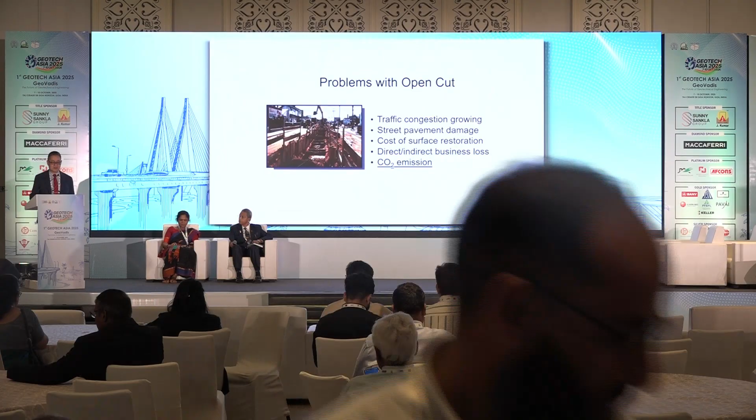Especially the mega cities with aged old pipelines. And as I said, the problems of the open cut, including traffic congestion, pavement damage, and indirect business loss, and also CO2 emission - those concerns are more and more important nowadays. So that's why trenchless technology is more and more attractive than before.

So according to the definition given by the International Society for Trenchless Technology, actually there are three major categories of this technology. The first one is on the top, called condition assessment, including the exploration of existing pipelines or underground structures.

I think most geotechnical engineers are quite familiar with that - we can use geophysical exploration to explore the underground conditions. That's one of the subcategories, on the left-hand side.

But on the right-hand side, for aged pipelines, we have to know the condition of the existing pipeline, so sometimes we have to do some internal inspection. The most common method, as you may know, could be CCTV inspection. But actually there are other technologies under development.

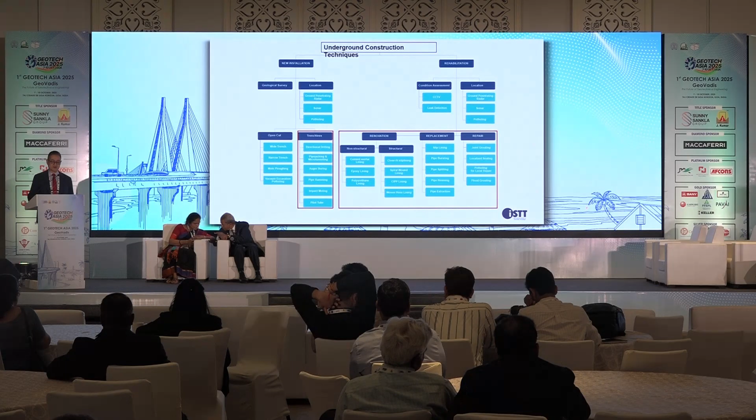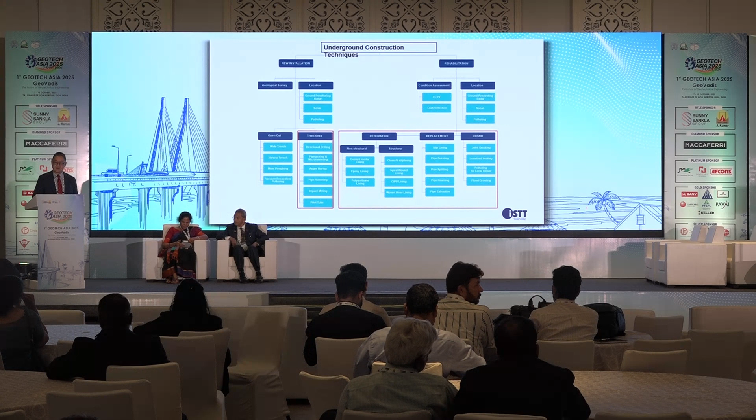Also recently, due to climate change, we have extreme rainfall. That also could cause some problems. You can see from the news, we have more and more sinkholes, surface collapse happening.

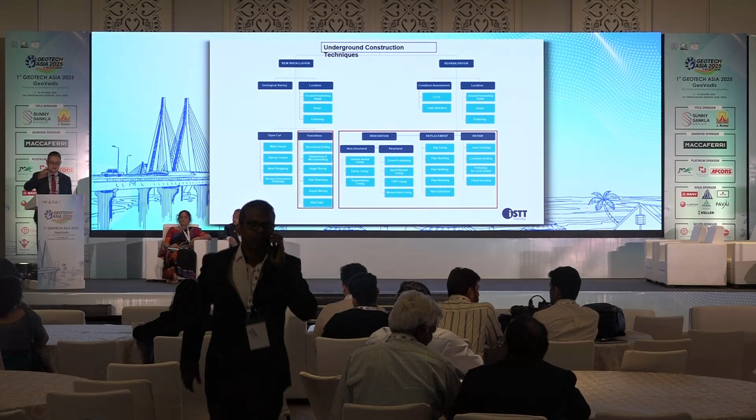The challenge now is how can we use methods to explore the potential location of sinkholes and surface collapse, especially since some of those sinkholes and surface collapses could be due to leaking pipelines or damaged connectors of the pipelines. So this is another subcategory of the condition assessment.

Right upper part of this diagram. And for the lower part, lower left is the technologies we can apply for new installation. I think we might be familiar with technologies called pipe jacking, shield tunneling, directional drilling - that's the most common, most popular method.

Actually, there are more than those three methods that we could apply. Each method has its advantages and disadvantages. So if you are interested, you can check the ISTT website - we have a new version of the guideline, a technical guideline. We have maybe more than 20 methods you could apply for new installation.

On the right lower part is the method we can apply for rehabilitation. We have a method that can be used for local repairing, and also we could just replace the old pipeline by installing a new one. In other words, the old pipeline will be abandoned.

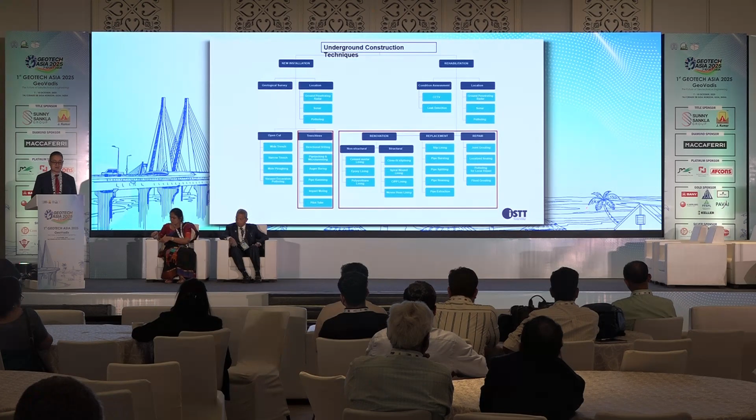The third subcategory we call renovation, means that we still keep some function of the old pipeline, but we install a liner to improve its function. So that's the method.

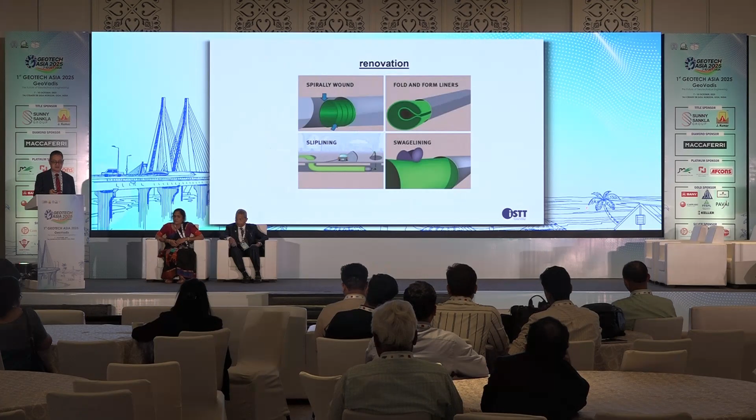Okay, so for the sake of time, I will skip this, focusing on two methods. I would like to show you that we have done some research. The first one is the rehabilitation, CIPP.

CIPP is the abbreviation of cured-in-place pipe. We install a liner inside the pipeline to improve its function, and the lifetime can be extended for 30 or 50 years more. The shape of the pipe can be different geometries.

The left-hand side is the image for the liner. The liner will be marinated with resin and hardened by the chemical reaction. It could be cured by heat or light, and then the liner becomes a hard pipe inside the pipe, as you can see from the upper right image. Then the pipeline has reborn.

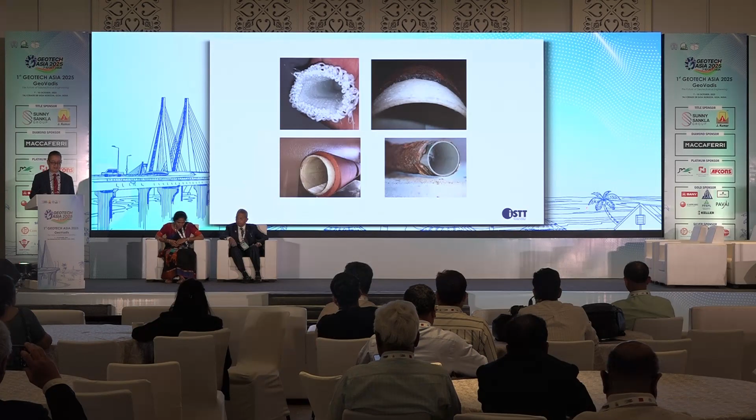So the application of CIPP can be used for pipes experiencing deformation, corrosion, and disengaged connectors, etc. The shape can be quite different.

The research we did is trying to understand what are the major control factors for the performance of the CIPP rehabilitated pipeline.

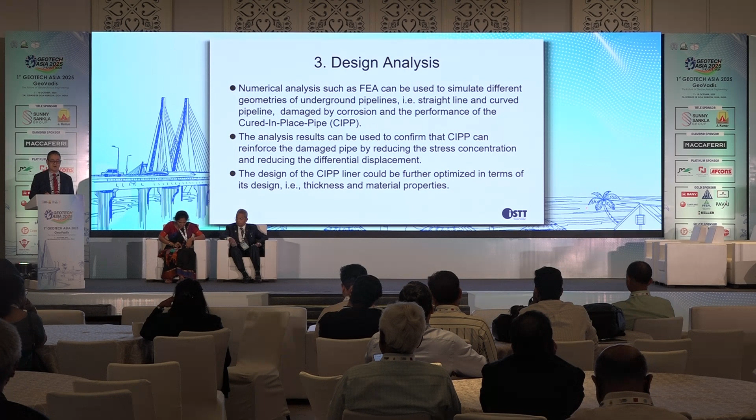If we think about the problem itself, it's more like a soil-pipe interaction, very similar to the simulation of tunneling in soil mass or rock mass. The only difference for this model is that we have one more layer, a thin layer of liner inside the existing pipeline.

So we have two interfaces instead of one. One interface is between the pipeline and the soil mass, the other is between the CIPP liner and the pipeline. We have to determine the parameters, the mechanical properties of those interfaces, in order to have a meaningful simulation. That's the important thing.

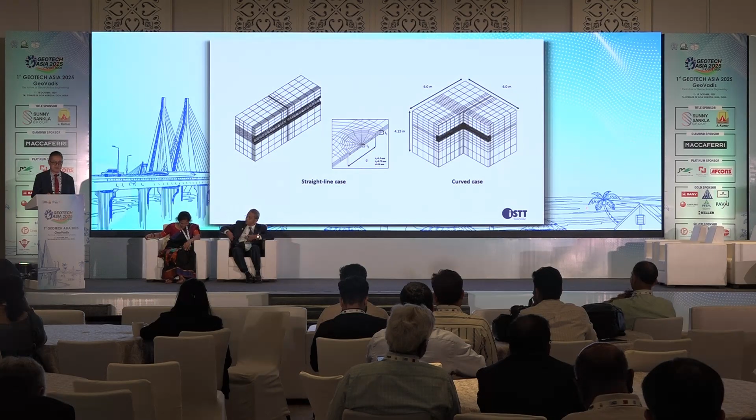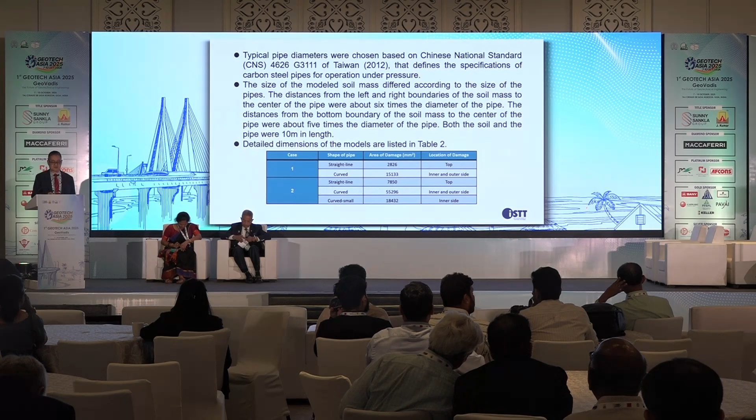So those are the parameters we applied, shown in this table. And also we simulate the problem with different geometries.

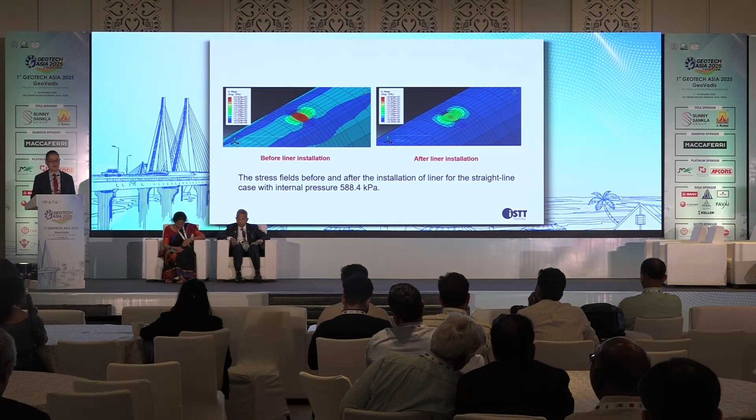These two figures show the stress distribution before and after the rehabilitation. You can see that after we install the CIPP liner and apply internal pressure, the stress concentration can be relieved. In other words, it also shows the performance of the CIPP rehabilitation.

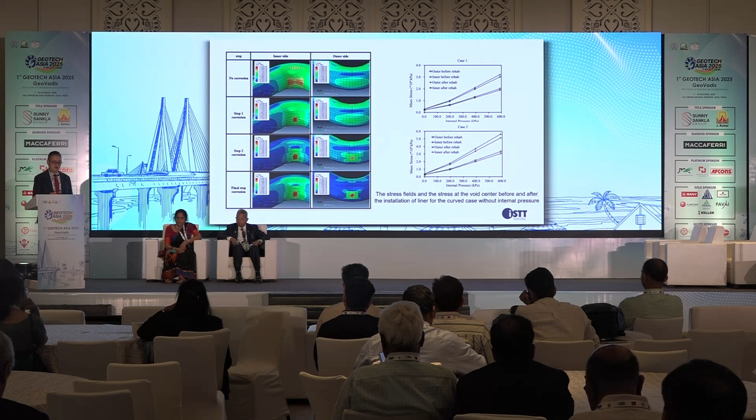So these are the performance results for cases with curved alignment. The cavity can be on the inner side or the outer side of the curve. For both cases, the performance is similar to the straight line case. The comparison shows those four figures in one column mean different depths of corrosion.

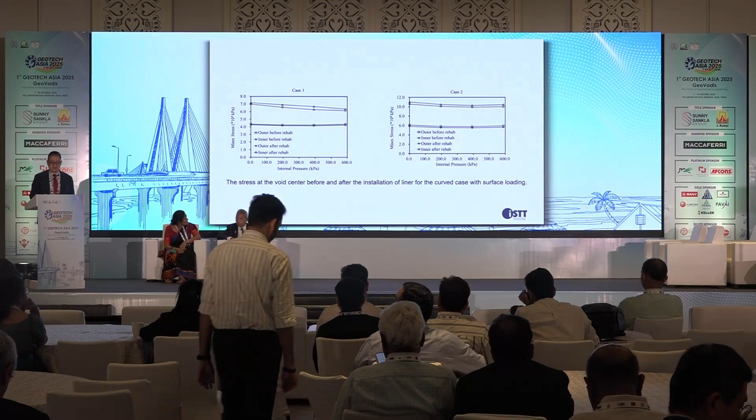So these two figures show the case, also a comparison based on the previous figure. It shows the performance as well.

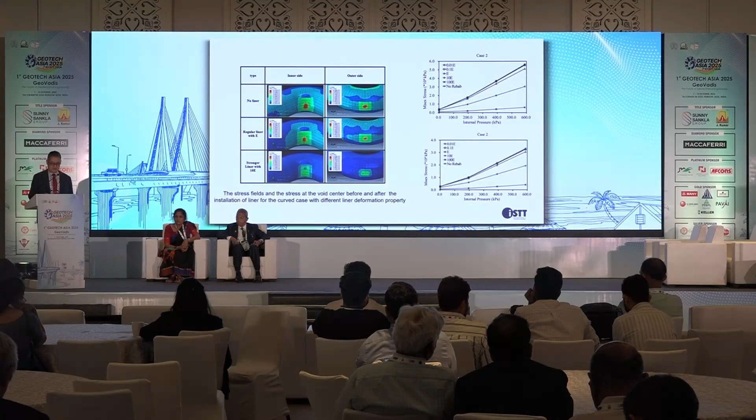Generally, in practice, the thickness is suggested by the supplier, the material supplier, based on their experience. But as a geotechnical engineer, we can double check whether it's over-designed or under-designed by using the analysis tools. So this is the beauty of this analysis.

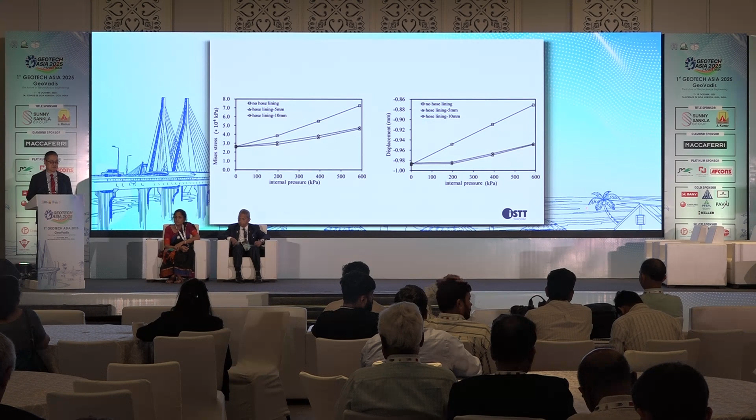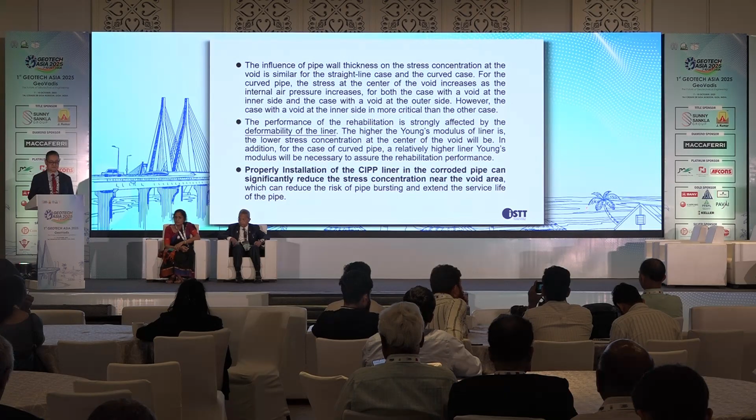Okay, this is the first part for the application of trenchless technology for rehabilitation. We also did some analysis for the rehabilitation of disengaged connectors, and we considered different scenarios. If you're interested, I can share some of our published papers. So this is the second part. The third part is new installation.

I'm going to talk about the series of analysis we've done for pipe jacking. As we know, for pipe jacking projects, the most important thing could be the jacking force. If the jacking force is not enough, maybe the pipeline cannot be jacked to the target location. But if the jacking force is too large, maybe that will damage the connector or the pipeline itself. So determining the jacking force can be very difficult.

Generally, we have some empirical formulas given by different scientists, guidelines, or standards. You can find these from guidelines of different countries, but still most of those formulas are empirical. Some guidelines are very detailed - they classify pipe jacking into different types of jacking machines, different diameters, different geomaterials, and you apply different formulas accordingly.

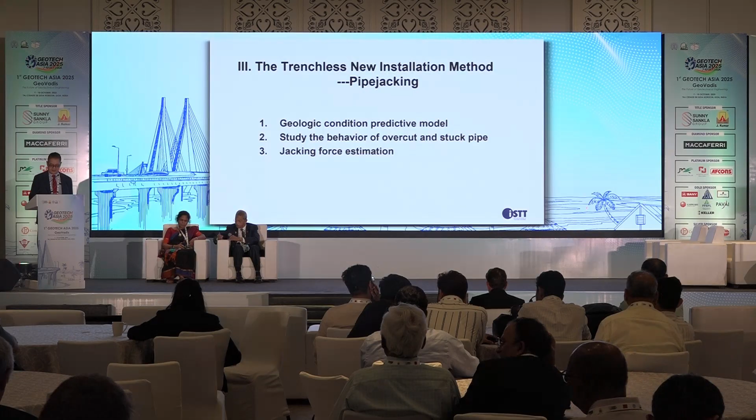We adopted one case in the Taiwan area, which could be very challenging because most of the formulas are not applicable. The geology for this case is on the west side of Taiwan, where we have a lot of alluvial formation, but with large size gravel like this. The largest diameter can be up to 1.2 meters - very big, almost the size of the pipe jacking machine. So very challenging.

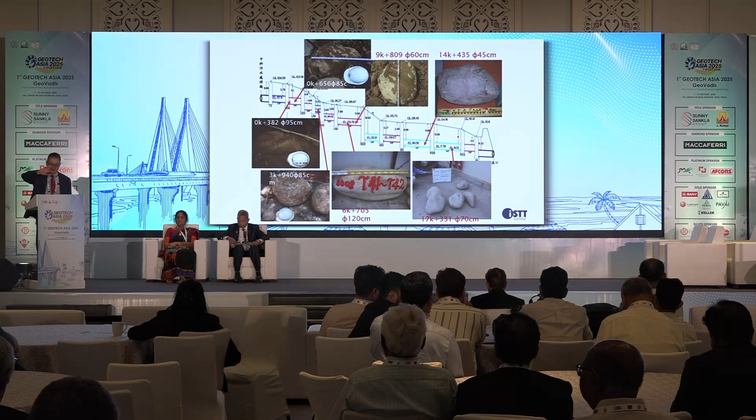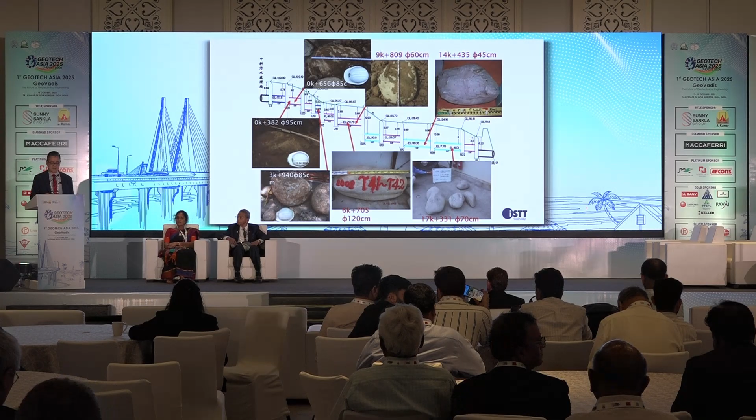So we tried to find the control factors, the important factors for the pipe jacking project first. We developed some geostatistics models to predict the probability of encountering large size gravel, in order to help the manufacturer of the pipe jacking machine improve their cutter head.

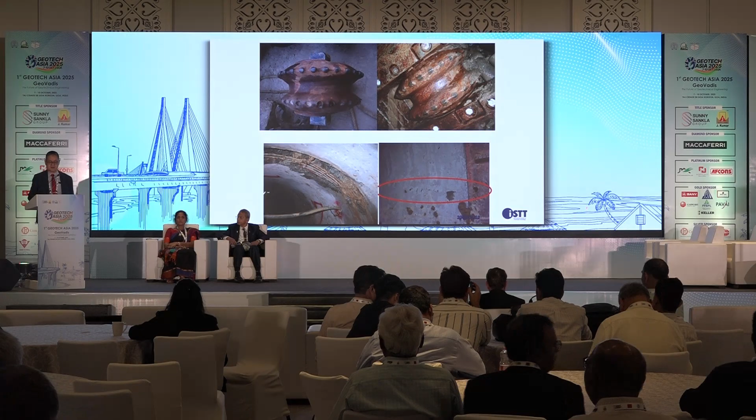You can see this is the difficulty or problem we encounter. This cutter abraded seriously - that will damage it, and since this cutter doesn't work anymore, the cutter head itself could be damaged further. So this is one of the major problems: abrasion.

And the second problem we could encounter is that the gravel gets trapped in the annular space and stuck the pipe string behind the pipe jacking machine, and it could also damage the connectors. This is the problem we have.

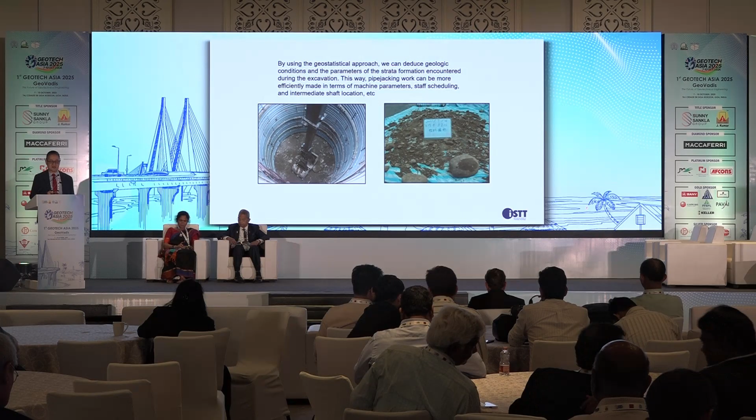So what we did first is try to collect samples from the launch and arrival shaft, do some sieving analysis, and use this model to see what geology we could encounter during the jacking operation.

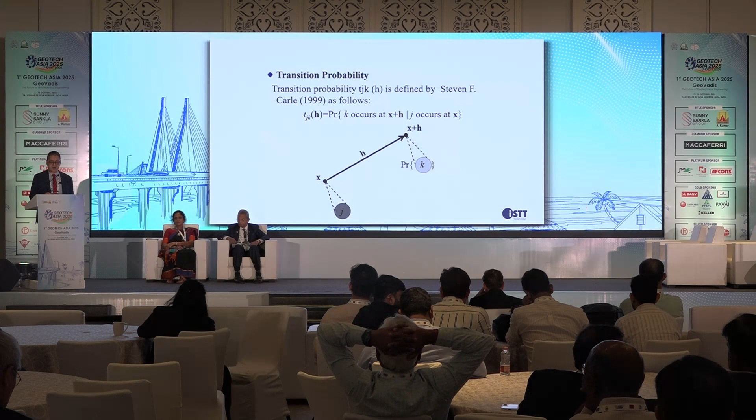Some mathematical model can be used, and we also applied a transition probability theory model to predict the largest gravel between the launch shaft and arrival shaft. This is the model we developed.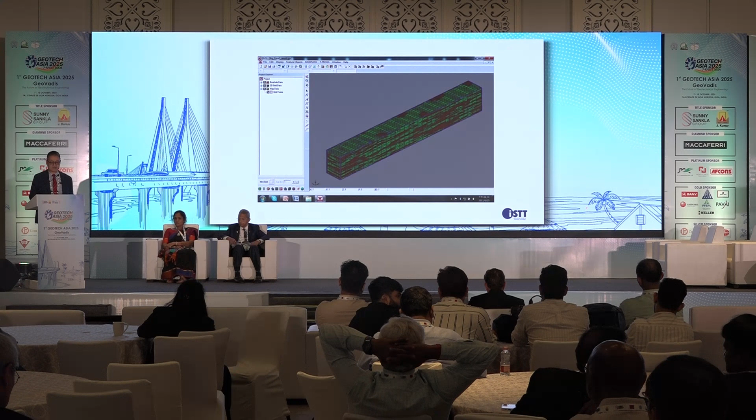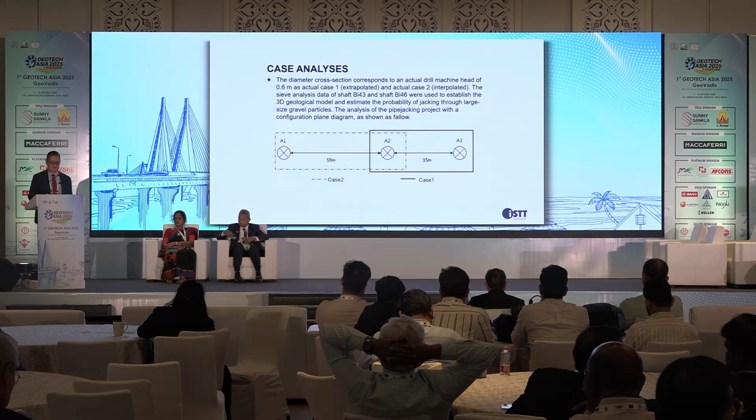You can see we separate the size into three different sizes, trying to simulate the geology with this model. Okay, this is the second part of the development, and then we can compare the advancing rate with the results of the statistical analysis.

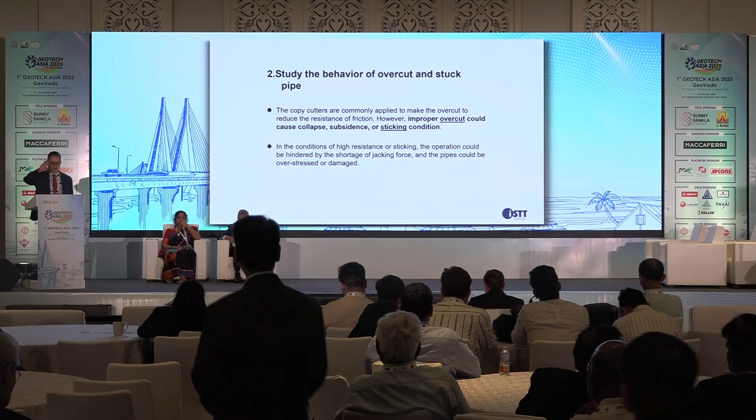So then let's talk about how, since the gravel can be loosened by the excavation, it can get stuck in the annular space between the pipe jacking machine and the soil mass. So the behavior of the overcut and the stuck pipe string was further studied.

So that's the analysis we did. Based on this finding, I think the major finding is that backfill will be helpful for the stress distribution, the stress field, and also lubrication to the interface is very critical, very important. Totally stuck conditions should be avoided, so injection of lubrication is essential for smooth operation.

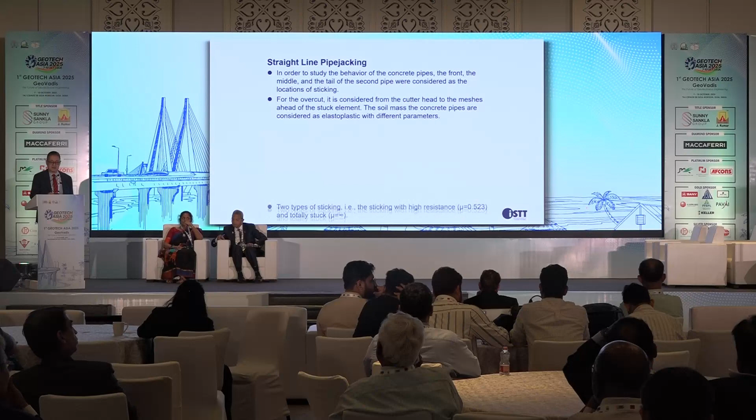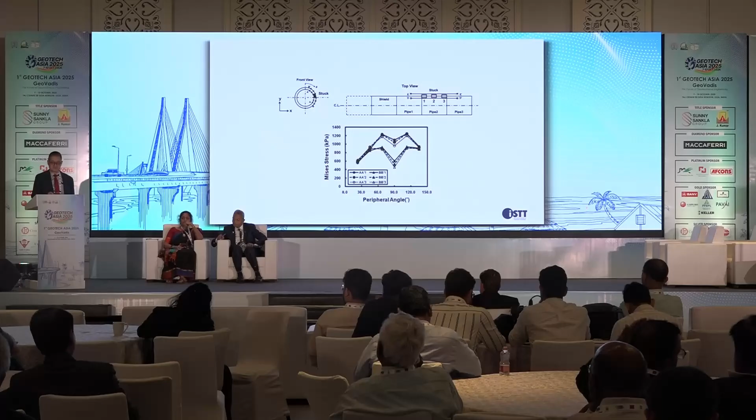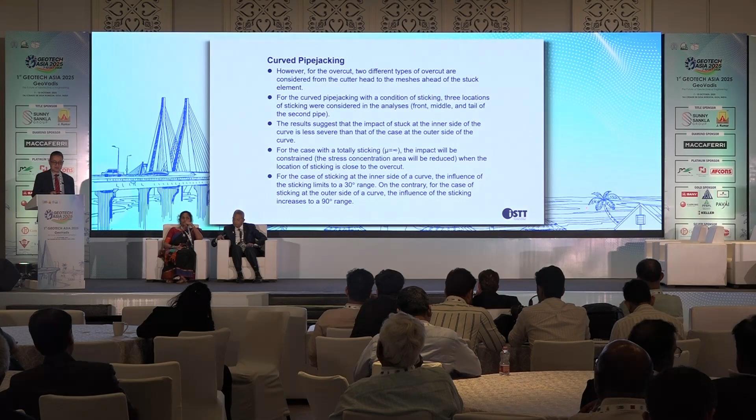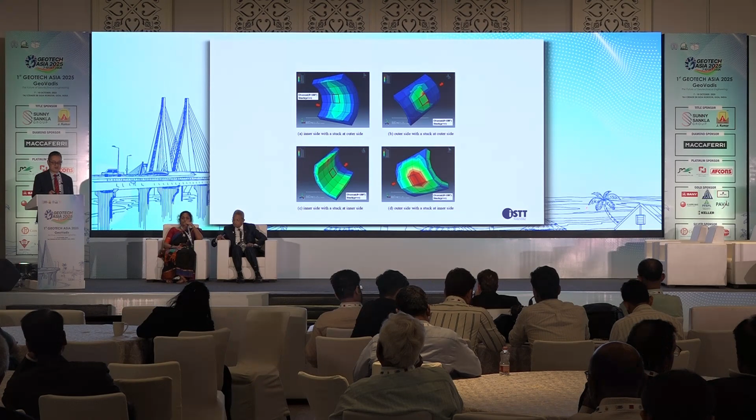This is finding the stress distribution, and also the results for the scenarios with different condition of the stuck, location of the stuck, you can see. So also, similarly, we did a similar analysis for curved pipe jacking. So again, we simulate the cases with the different scenarios of overcut and different locations of stuck. Most of them are stress analysis and comparison.

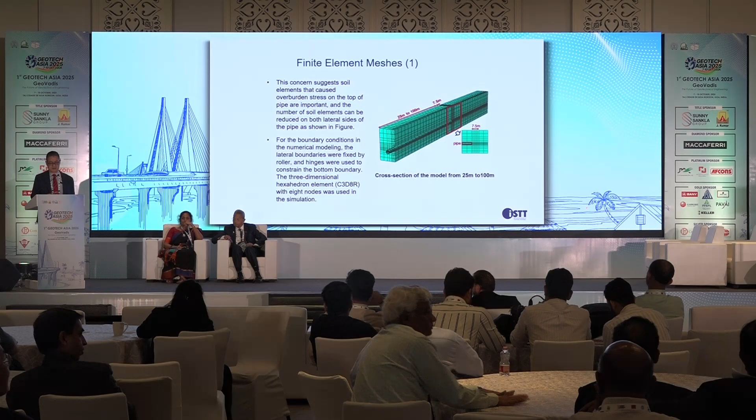Okay, for the jacking force prediction, as I mentioned previously, the most common way to predict the jacking force is to use the empirical formula. But we found that the formula can be quite different, especially when you jack the pipeline longer and longer. The discrepancy between the jacking force predicted by different empirical formulas will be large. So it's quite uncertain based on this prediction.

So what we did is we tried to use the method called displacement control method. Because when we simulate the pipe jacking, we apply the force behind the jacking machine to push the pipeline ahead. Although we put in place the interface property with a suitable frictional coefficient, still it's difficult to determine the jacking force. Sometimes it's pushed too far, sometimes it's pushed not enough. So the method we apply here we call the displacement control method.

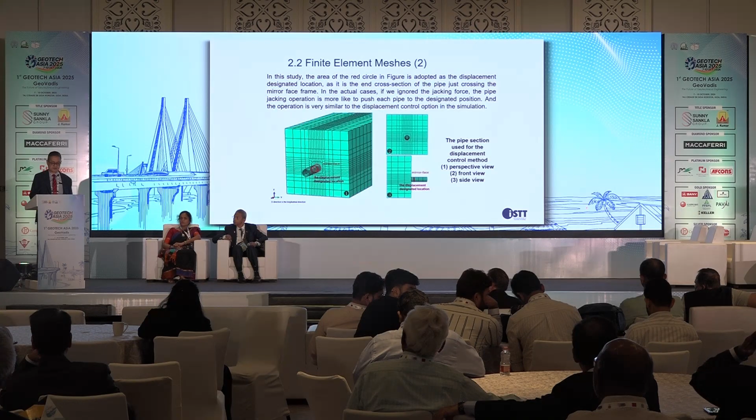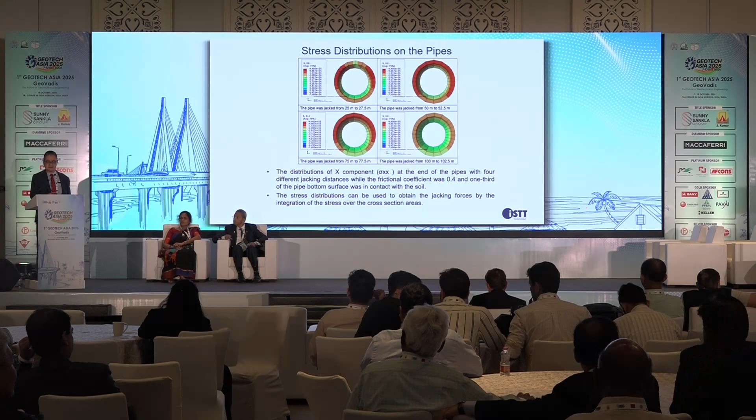You may remember that for the numerical model, we can assume that the pipeline moves forward a certain distance. So we manually or artificially move the pipeline ahead to the distance we assign. And then we integrate the stresses behind the element representing the pipe jacking machine. So we can determine the jacking force based on the integration of the stresses. So this is the idea. So you can see the distribution of the stresses behind the pipe string, and we integrate that to determine the jacking force.

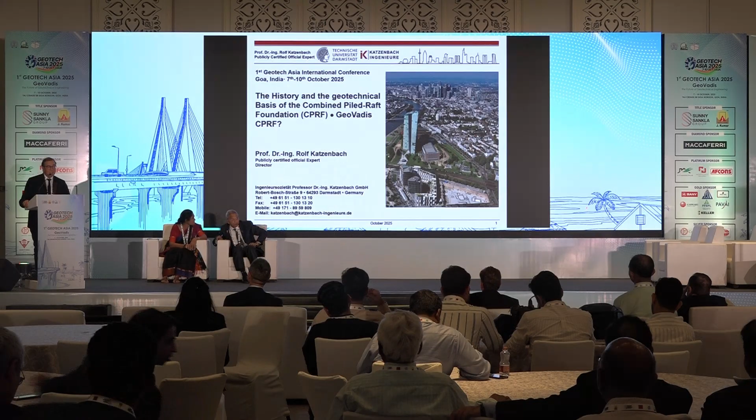Let us look to the history you have seen in the first slide. My home city, Frankfurt. The front there is the European Central Bank, and in the background the banking center. In Frankfurt, we have the following ground situation. On the top, after 4 to 6 meters of quaternary gravel and sand, we have the so-called Frankfurt clay. The stiffness is increasing with steps, with values of about 15 to about 50 meganewton per square meter.

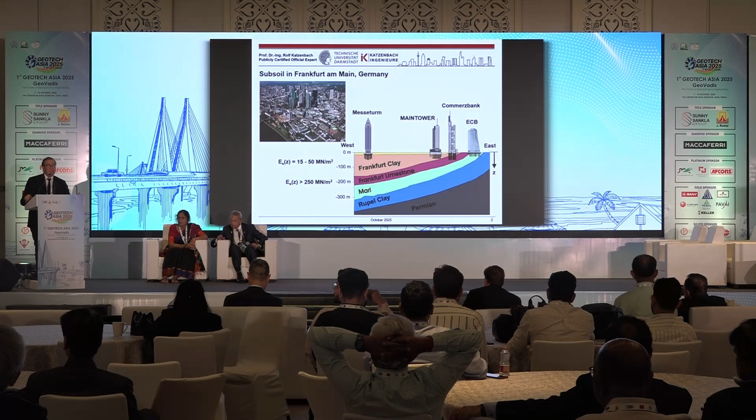Under Frankfurt clay, we have limestone, quite stiff material with a stiffness of more than 250 meganewton per square meter. That is more or less a rocky layer. That means ideal for geotechnical experts and consultants. At each position in Frankfurt, we have other and changing ground conditions.

What is the problem in my home city, Frankfurt? You see the problem a little bit from the curves on the right-hand side. There is plotted versus epsilon 1, the vertical strain, the stresses, or the deviator stresses, sigma 1 minus sigma 3. And you see a lot of different curves with relatively normal, respectively high stiffnesses. And at the bottom of these curves in red, you see the load settlement curve or the stress-strain relationship of

Frankfurt clay. And from this weakness of Frankfurt clay, you can imagine that the main problem which we have in Frankfurt are the total settlements, especially of the high-rise buildings. And if you have great total settlements, the next problem are the differential settlements. So it's necessary to find a technology for the reduction of settlements in the relatively soft Frankfurt clay.

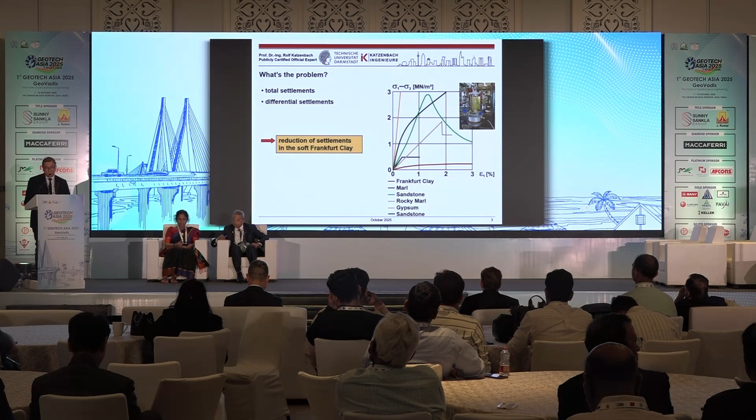Some examples, and we understand that as geotechnical engineers as large-scale tests, in parentheses for sure. The first generation of the Frankfurt high-rise buildings were founded on shallow foundations on big rafts. The reason was it was totally impossible to create bored piles in Frankfurt clay. There were no machines available in the 1970s and in the early 1980s.

So we had extremely high settlements, for example, for the Marriott Hotel with a value of 34 centimeters. 34 centimeters. That is normally not tolerable, I would say, for a building which is more or less used as hotel and as office center.

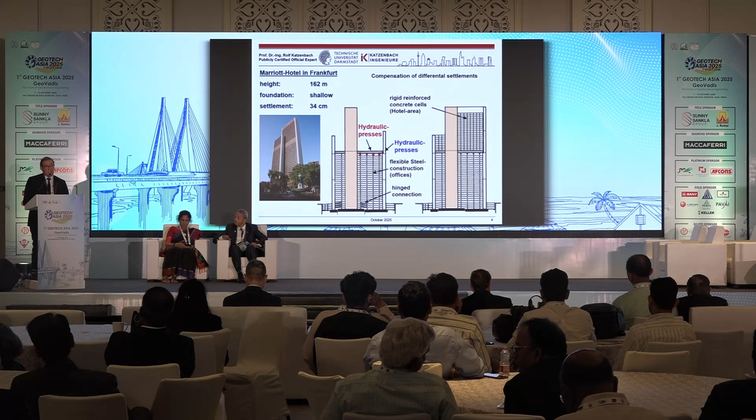And because of the differential settlements, it was necessary to install hydraulic pressure cells at the level of about 20-25 stories in order to have a horizontal basis for the upper part of the building with a hotel sector with a very, very rigid construction made of concrete cells. And these concrete cells would never allow the deflection and the differential settlements which occur there.

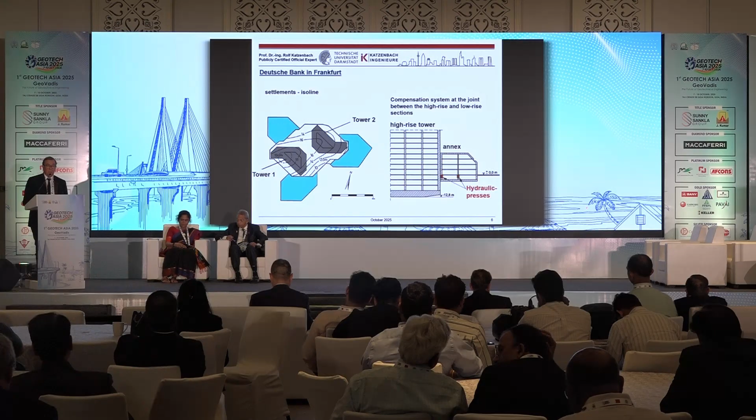Meanwhile, these technical rules are updated, so that it is indeed allowed, even by the German standards and the European standards, to mix these types of foundations and to combine them. And from that, the name is derived, combined piled raft foundation. And the best example for this is India.

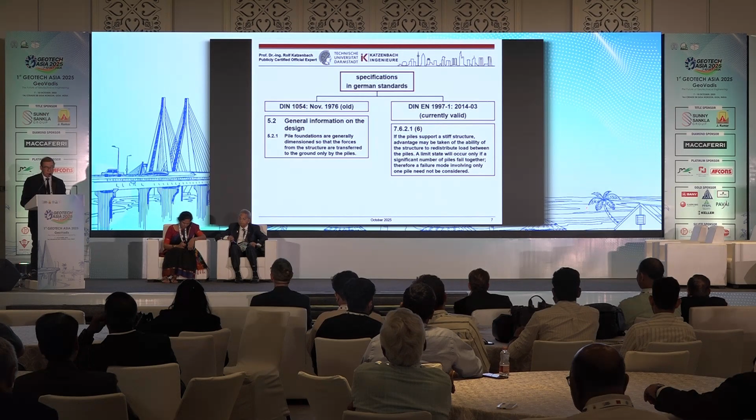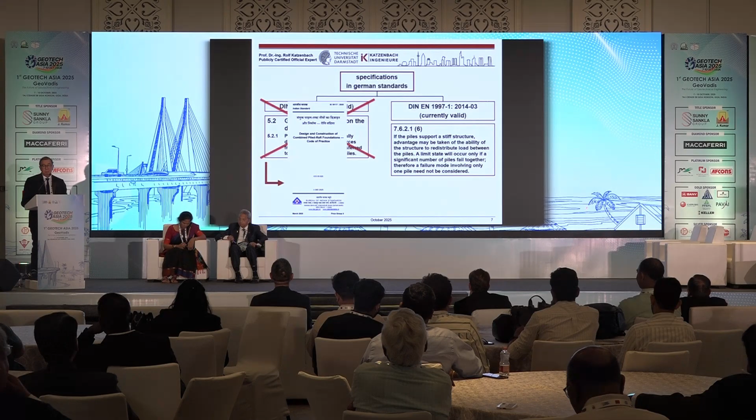In India, we have indeed wonderful technical standards, the so-called Indian Standard with the number IS 19117, where the rules for the design and the application of combined piled raft foundations as a code of practice are available. So the old-fashioned one you can forget, and it is now given by this standard which I mentioned.

Combined piled raft foundation has a lot of advantages and objectives: reduction of settlement and tilting, increase of bearing capacity of a shallow foundation, and so on. To make a long story short, combined piled raft foundation is a special form of soil improvement technology. You put piles in addition to the foundation system and create stiffness, and with a great advantage, you transfer loads from the level of the foundation into deeper areas where mostly stiffness is increasing, like in my home city, Frankfurt.

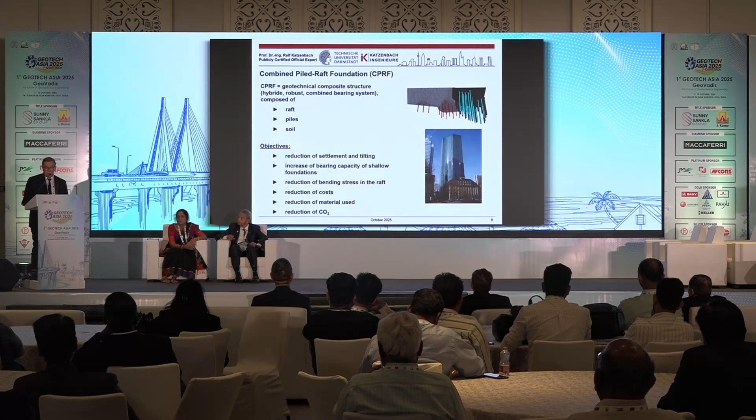Now it doesn't proceed. Oh yeah, there it is.

Short information about the methodology we work by, carrying out at least the rules for the design of a combined pile raft foundation. And that is always the same. You know that from your own personal experience. On the one hand side, the theoretical model that must be top and without any mistakes, and the experimental research on the other hand side. And the most important thing are the measurements at the site.

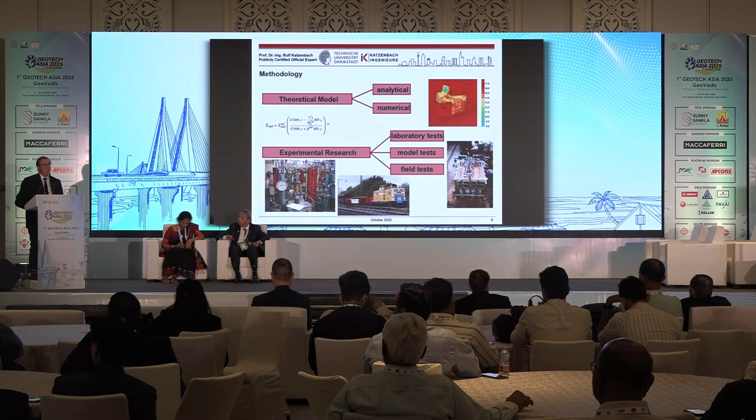We understand each high-rise building as a big field test where we get the real information about the behavior of the construction. I can tell you an important story, which is not normal worldwide, as I learned from a lot of conferences. In Frankfurt, it is a duty given by the building authorities that all these high-rise buildings are controlled by a monitoring system until 5 years after construction, so that we have real and very perfect information about the real behavior of high-rise buildings under the local conditions.

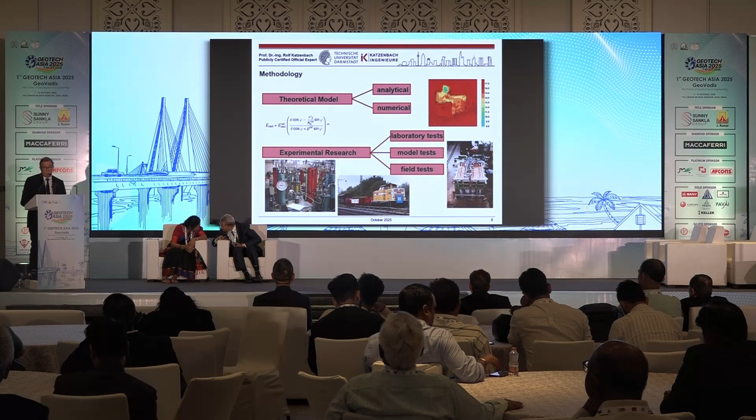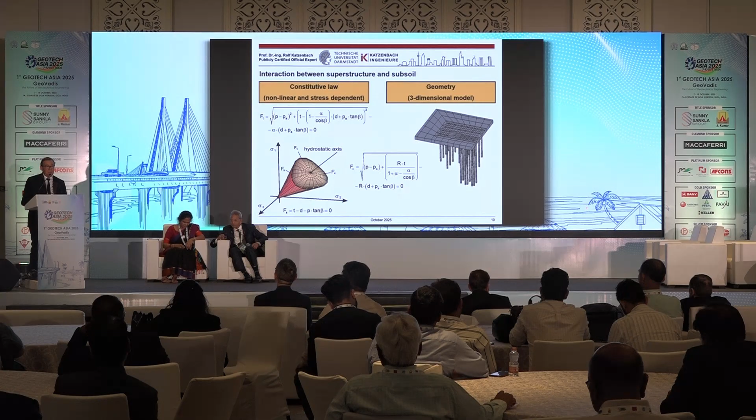I think that is worth to be learned as experience, how this philosophy of observational method is applied, and even authorities apply that because their knowledge is quite qualified in that special and complicated case. Certainly the constitutive law is an important detail, that it is correct, more or less fitting to the real behavior, but with these lots of measurements we can control the quality of our calculations before and after the design and compare it with the behavior of the buildings.

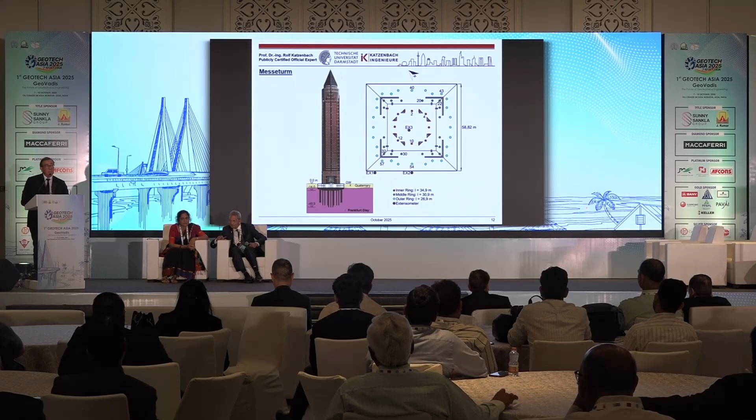The most prominent and the first example of a high-rise building in Frankfurt built on a combined pile raft foundation is the high-rise building Messeturm with a height of 256 meters. If we would build it on a shallow foundation, we would get settlements of 40 centimeters. That we calculated on the basis of the examples that I showed you before, and you can imagine that is not acceptable. What to do? We applied the combined pile raft foundation. You see here the pile layout, and a lot of these piles are equipped with measurement devices.

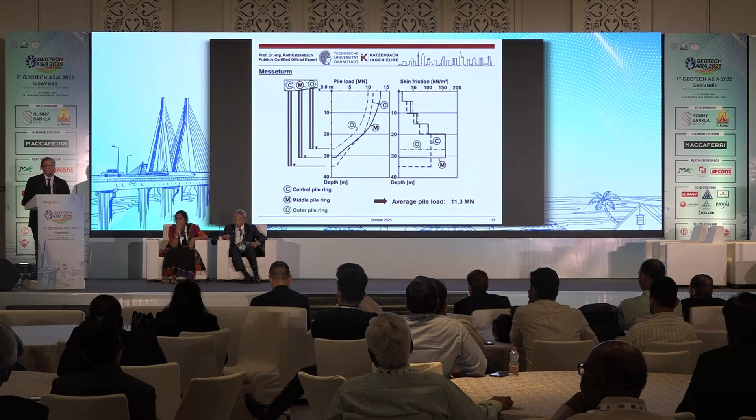And here you see a typical result of the load transfer and the load distribution versus depth. In the upper 10 meters, there's more or less no skin friction mobilized, and that means there is no reduction of the pile load. And in the deeper part, we have very, very high skin friction with up to 150 kilonewton per square meter, which is for Frankfurt clay an enormously high value. And that is a result of this pile group effect and the higher stiffness in the deeper area of Frankfurt clay. And knowing about these results, we could scale our modeling of these combined pile raft foundations.

In result, you have seen the slide, the 64 piles would mobilize at maximum, ultimate load, 64 multiplied with 11.3 meganewton per pile, 725 meganewton. The building load, which has to be carried into the underground, is 1,570 meganewton. Simple question, who in the audience would give his signature under such a design and say it's okay? The piles are not sufficient to carry the load safely into the underground.

And for sure, what happens? We should not forget the load transfer via contact pressure directly under the raft. Nobody can avoid the contact pressure. It is there, that is pure physics. And so the sum of both, the contact pressure with a value of 845 meganewton and the pile capacity of more than 700 meganewton, carries the load safely into the underground. That is a new thing, absolutely new, that it is allowed to use the piles up to the ultimate geotechnical capacity and load.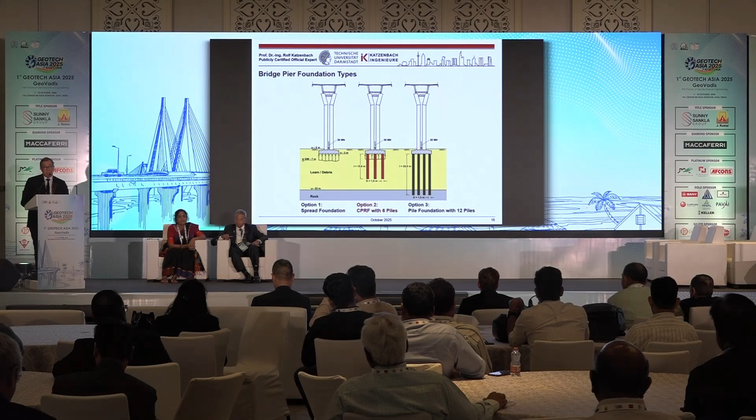A lot of bridge foundations with a lot of pillars and abutments are available, and here a short example, 3 alternatives: shallow foundation, combined pile raft foundation in the middle, and a classical deep foundation in a deeper rock layer. Have a look at what happens. A shallow foundation settlement: you see the load settlement curve, to the right the load, and downwards the calculated settlement. The working load is 30 meganewton, a settlement of more than 10 centimeters, normally not acceptable for a bridge pier.

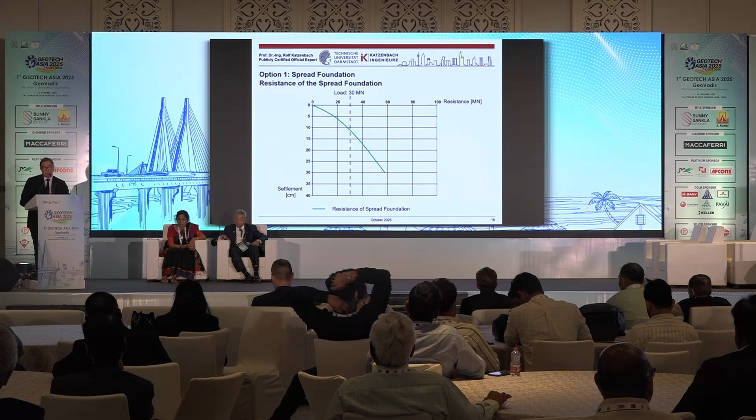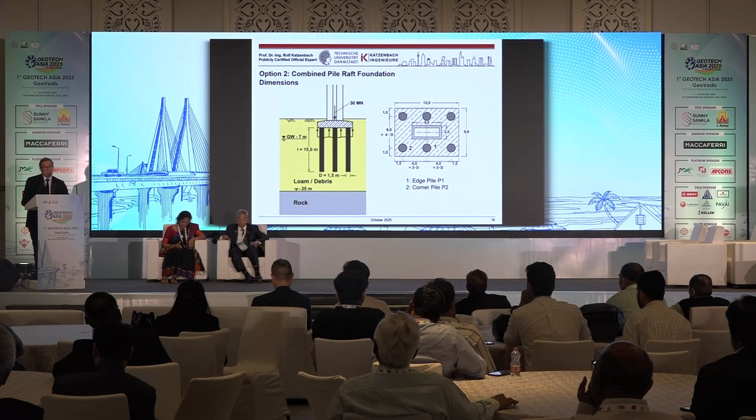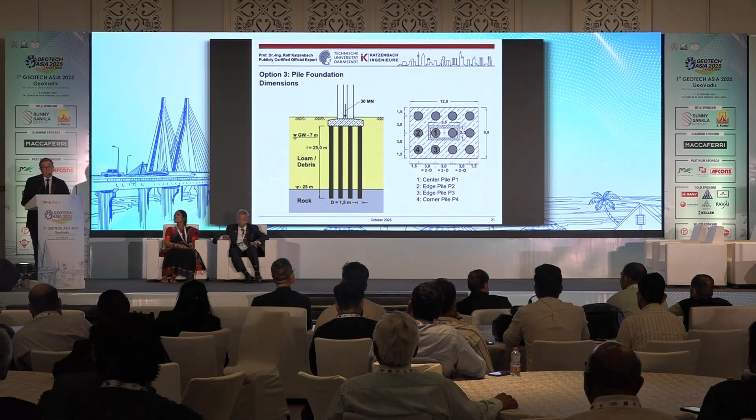Next solution, where sometimes now it works, is the combined pile raft foundation. You see only 6 piles, swimming in the loam and debris material. The settlement curve you see here, in total about 3 to 4 centimeters at working load. And what is interesting with the calculation, we can calculate the failure of a foundation. You see these nonlinear curves which characterize correctly the soil behavior. And the pile foundation with a settlement which is certainly very small, 1 to 2 centimeters, because of the high stiffness of the rock.

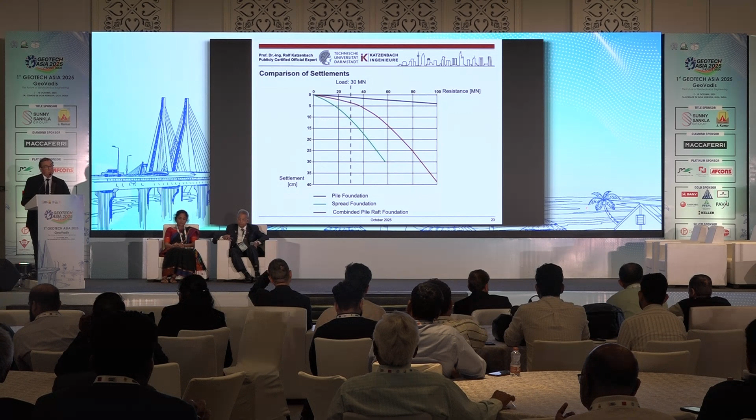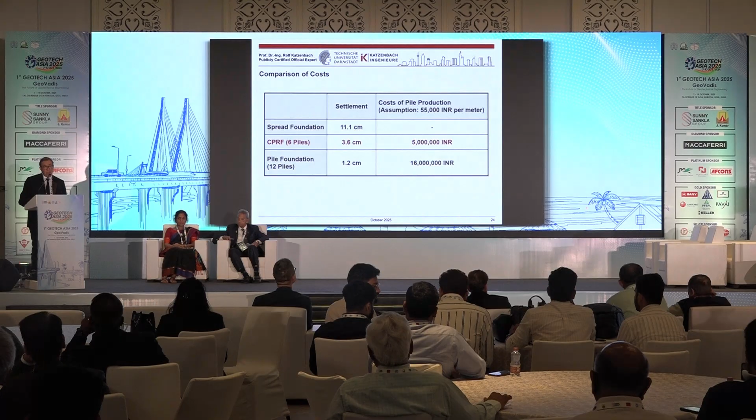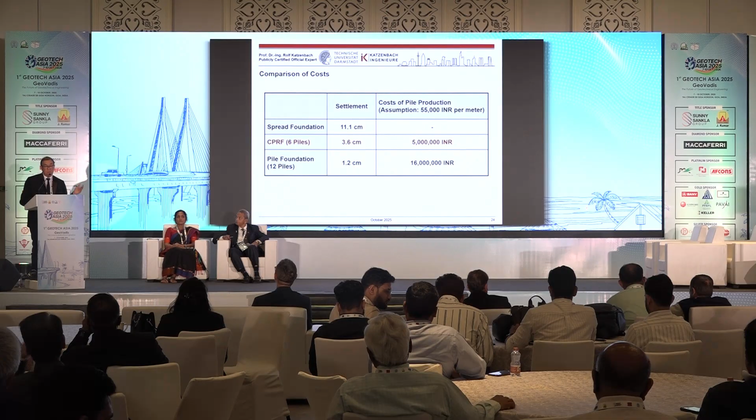What is important are the settlement differences of these 3 types of design. What is important are the costs, for sure. You see, CPRF, 6 piles, is 5 million Indian rupees, and the pile foundation is 16 million Indian rupees per 1 pillar. Normally a bridge has a lot of pillars, the metro lines, which are often founded on bridges and pillars, and so it makes sense to apply this type of foundation technology in the sense of GeoVadis geotechnical engineering and GeoVadis CPRF. We save a lot of money, and it's without any risk. It's a soil improvement technology which helps to make the underground and the whole system stiffer than normally.

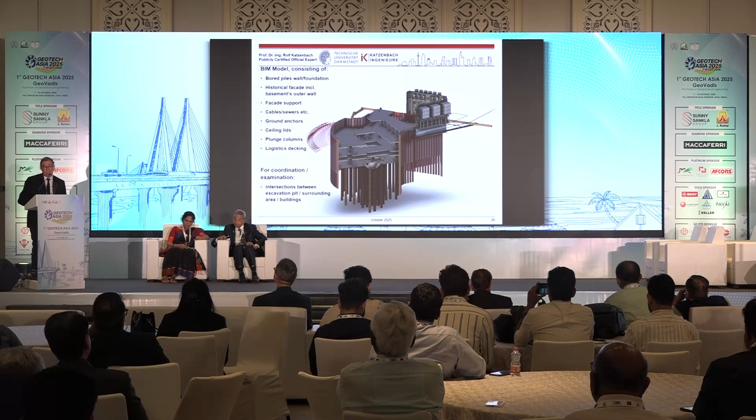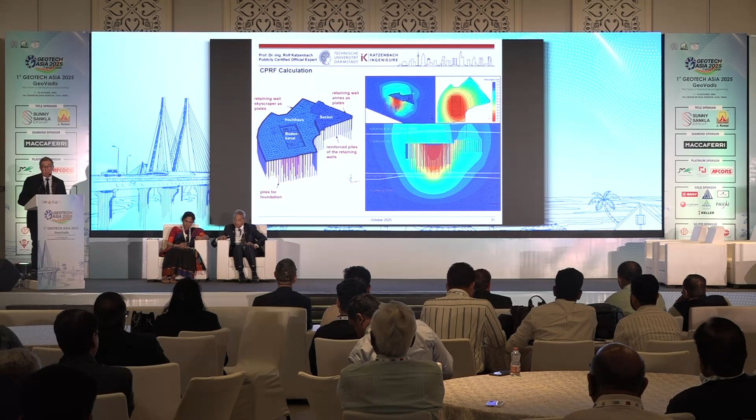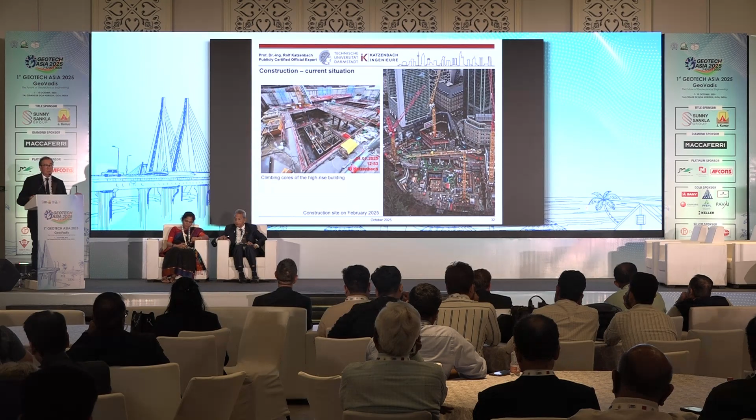Here a photo from the current situation at the site, which is just under construction. Meanwhile, the high-rise building has a height of about 20 to 25 meters. So the CPRF is daily applied in my home city, Frankfurt, and I think meanwhile in a lot of cases out of Frankfurt and out of Germany. I hope for the application here in India, as you have this new technical standard.

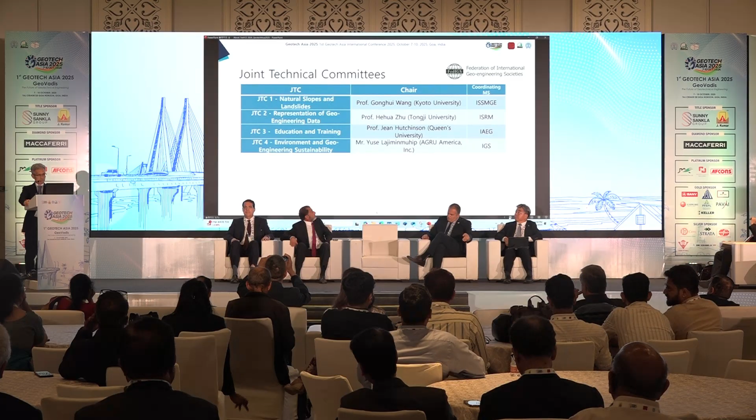We have 4 joint technical committees: JTC1, natural slopes and landslides, managed by ISSMGE. You can see the name of the chair. JTC2, representation of geoengineering data, managed by ISRM. JTC3, education and training, managed by IAEG. And newly created JTC4, environmental and geoengineering sustainability, managed by IGS. So what are the goals? To facilitate interaction among the member societies, to explore opportunities in promoting common interest, and to provide a unified response to common issues through collective action.

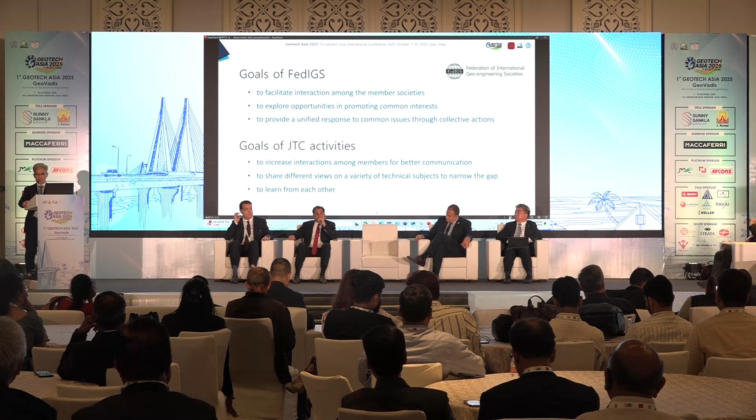And what about the goals of the Joint Technical Committees? To increase interaction among the members. We are dealing with the same material, but sometimes we are not on the same page. We want to share different views on a variety of technical subjects to narrow the gap and to learn from each other. The FedIGS board meets once a year in person, but has many online meetings. This year, we had the board meeting in Goa. Very nice venue, probably the best we have had. Thank you to the organizer, the Indian Geotechnical Society. You see the pictures.

JTCs also have a lot of activities. Next year, JTC1 and JTC3 will have a joint workshop in New Zealand. JTC2 is also doing a lot of work, and they have their own conference, ICITG, International Conference on Information Technology in Geo-Engineering. Last year we had it in Golden, Colorado, US. Next year we will have the 6th ICITG in Graz, Austria. And JTC4 is working very diligently on a white paper on sustainable geoengineering. So JTCs are working very hard, and the board members are supporting them very hard.

This is a special thing, introducing the FedIGS Mega Conference. Some of you know that we had GeoEng 2000 as a mega conference, the first International Conference on Geotechnical and Geological Engineering, organized by the Australian Geotechnical Society with initiatives by ISSMGE past president, Professor Jamiolkowski. It was successfully held in Melbourne in November, jointly supported by 3 members before FedIGS was created: ISSMGE, ISRM, and IAEG. During the conference, a lot of geotechnical and geological engineering themes were covered.

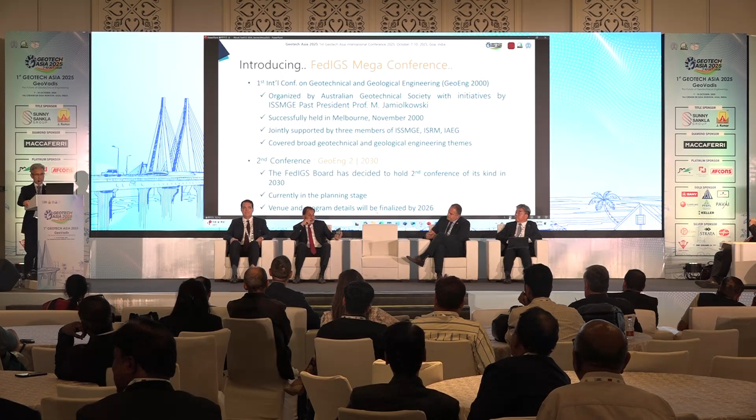Now this is the FedIGS session. This is also a historic day. This is the first FedIGS session we've ever had. We talked about having this session for a long time, but this is the first session.

So there are a lot of geoengineering problems related to climate change, so we have to do something. We have to provide mitigation measures. So today's session we'll talk about this - you cannot draw a conclusion, but I hope that this session will shed light on what we have to do as geoengineers. With that, I'll call Andrew to moderate this session.